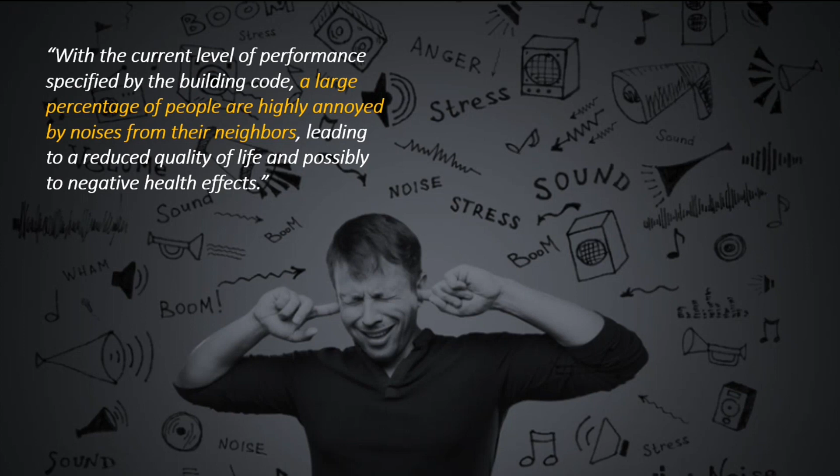So first, to start the conversation, I'll start with my favorite quote: with the current level of performance specified by the building code, a large percentage of people are highly annoyed by noises from their neighbors, leading to a reduced quality of life and possibly negative health effects. This comes from the ICC, the International Code Council, their G2 2010 guidelines for acoustics.

I know there's a lot of acousticians here, so this is nothing new, but for any architects, contractors, or other folks here: the STC and IIC requirements in the code are minimums. Typically, as acousticians for market rate apartments and especially condominiums, we try to design above those code minimums. Keep that in mind as we go through this conversation about shear walls and the STC ratings for them.

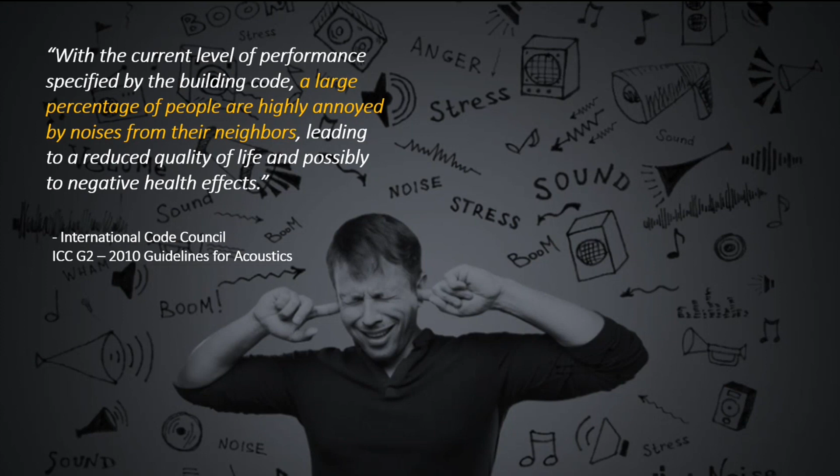There are a lot of other kinds of projects too—schools, hospitals, government buildings—where we have different STC targets we're going for. Sometimes they're higher than the STC 50 code minimum for multifamily, sometimes lower, just depending on what we're dealing with. But that's just to set some context for us.

For some additional information, these are recommended ratings from the ICC guideline document, recommended for multifamily residential construction. STC and IIC 50 are the code minimums. The acceptable performance level is STC and IIC 55—I think a lot of acousticians typically use that for market rate apartments. It might vary from person to person, but that's what I typically see.

And then preferred performance is STC IIC 60—you'll see that recommended a lot for condominiums and things like that. So keep those numbers in mind, especially STC, since we're talking about shear walls here.

So what are shear walls? Not to assume everybody knows what we're talking about—all the examples I have today are wood stud walls, typically 2x4 wood stud walls, but you can have shear panels in steel construction as well.

The shear panels are there to resist the racking motion of the wall. You typically see them in load-bearing walls, there to resist the racking motion of the building structure. They're even more prominent in seismic areas, like here in Oregon where PAC is, where I am, because you have more that might happen to the building in an earthquake event, so you need more shear strength to resist that motion.

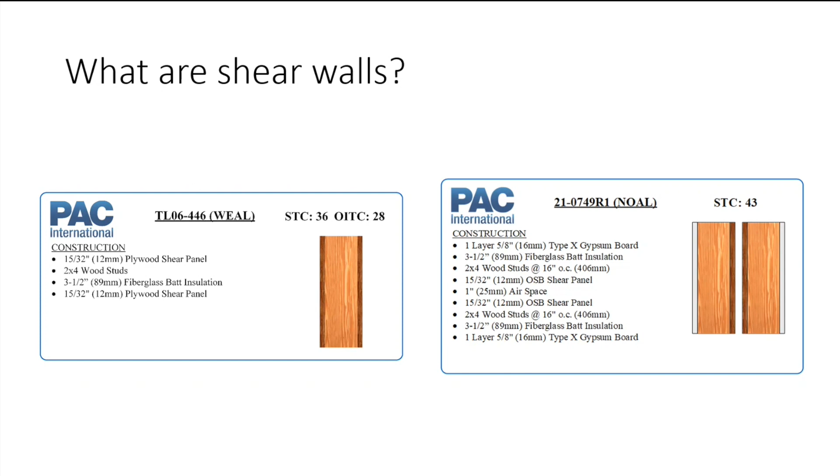So to understand why the shear panels maybe create more of an issue, just real briefly: through a wall, we have two transmission paths for sound. We have a structural path, which would be your surface layers. As the air waves, the sound waves hit them, those air pressure fluctuations will make that surface vibrate, and those vibrations get transmitted through the structure it's connected to, and then transmitted to the other side, and that excites the air on the other side of the wall. That's one path that we have.

And when we apply sound isolation like resilient channels or sound isolation clips, or we do two separate studs, we're interrupting or breaking that structural transmission path. But we have another transmission path too that we need to be concerned with.

That's really what comes into play in some of these double shear wall configurations, like that double stud - this air cavity path. The sound waves hit upon the wall, they make this panel vibrate, and that panel makes the air inside that cavity vibrate, and it transmits through, makes the panel on the other side vibrate, and then radiates sound out. So really that air inside the cavity acts like a spring.

If you remember summer camp, those big blob things they'd have at the swim areas - you would jump off of it, and somebody could be on the other end, you jump on it and the air would push the person up and they'd go flying in the air, shoot off. So we're using that air as a spring to transfer the energy of the impact on one side to the other side and push the person off. That's what's happening here with this.

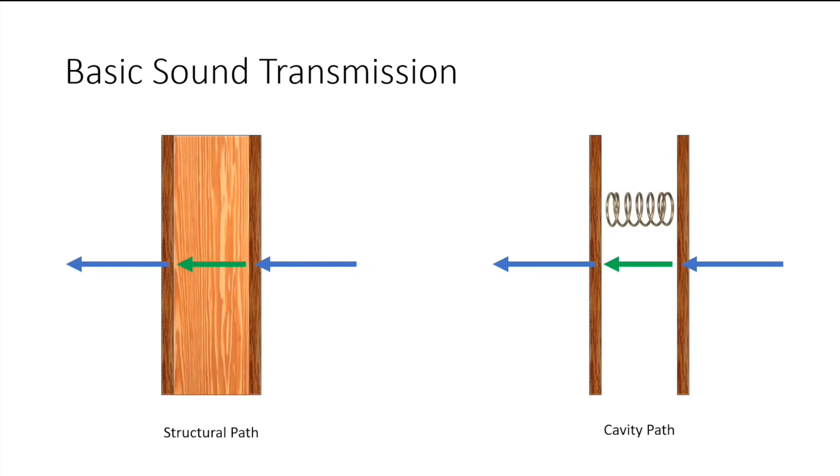So think about, okay, well, we've got a shear wall. We have our shear layers that have to be attached to the structure. How do we get some isolation in here? Well, let's just add isolation on top of the shear panels. That improves the wall. If we remember, this base wall was an STC 36.

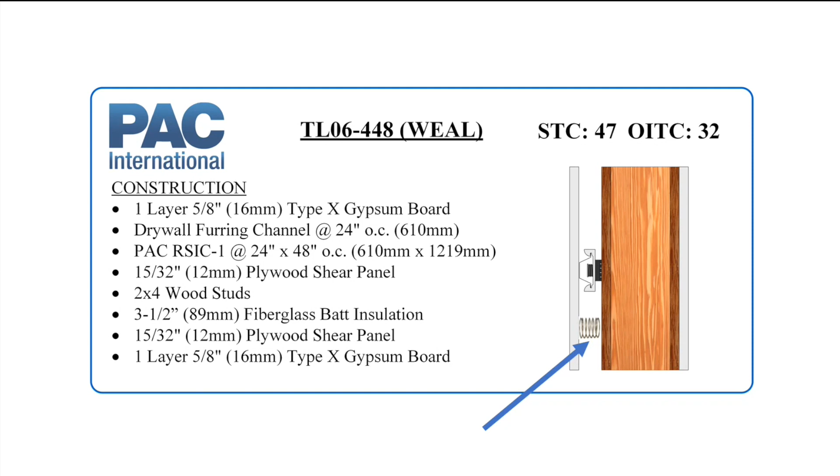We've got a 47 now, but we're still not to the code minimum. And part of that is because we've created this little air cavity and we've got this air spring in there, that's transmitting energy from one side to the other. So we can add insulation to that cavity to basically damp or resist that motion of the sound waves within that cavity, and we can get performance gains.

So here we have an STC 53. Now we've brought this wall back up above the code minimum. We've still got our double shear panels, and it's a fairly straightforward wall - single layer of sheetrock on each side, resilient clips for sound isolation. Pretty straightforward, not a super expensive wall, doesn't take up a ton of space.

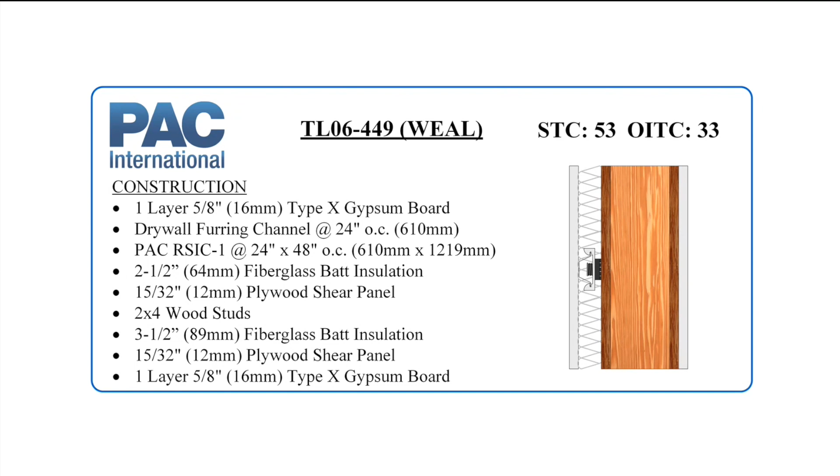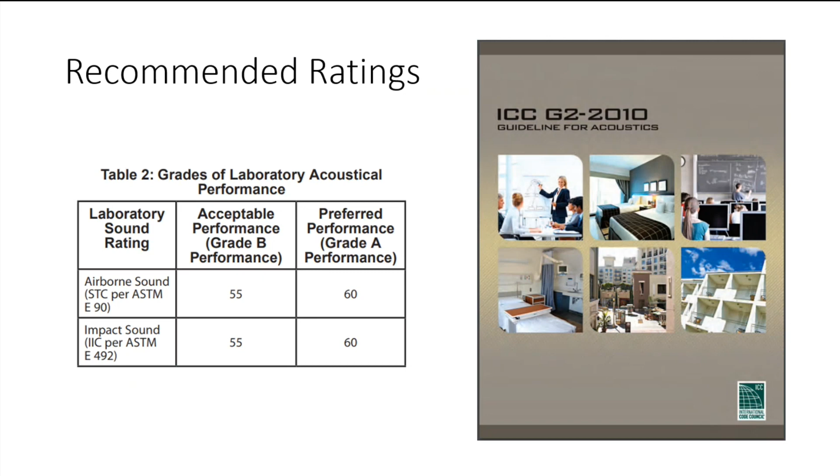So that's the basic gist. Now I'm just going to go through and show some data because there's some interesting stuff that happens. We'll talk through the data for both a single stud and a double stud wall. Just as a reference as we go through these: code minimum is 50, acceptable - maybe like market rate apartments - 55, preferred 60.

So here's some double studs just to show the range of these and how we can work our way through. We start with the basic wall, STC 43. That wall, if you remove those two shear panels - and I'll show the data later - that's an STC 56 or thereabouts. So we see a big reduction in performance by adding those shear panels. If we just add mass, doesn't really get us a whole lot. Adding resilient channel on one side also doesn't get us a whole lot, because we just haven't changed that air stiffness coupling enough to really get the performance we need.

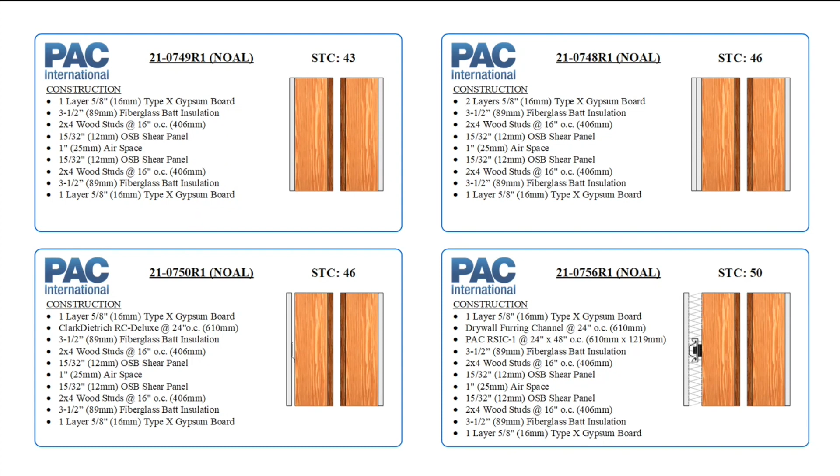Going to the RSIC clip, getting a bigger airspace, getting more isolation gets us to that code minimum of STC 50. So we'll walk through these.

As a baseline, here's a typical wall design: a 2x4 wood stud wall, RC Deluxe, single layer of gyp on each side, tested at STC 50. There are times you'll test this and it comes in below 50 — I wouldn't count this wall as a true 50, but it's the data I had to pull to give you TL data, so take that caveat into account.

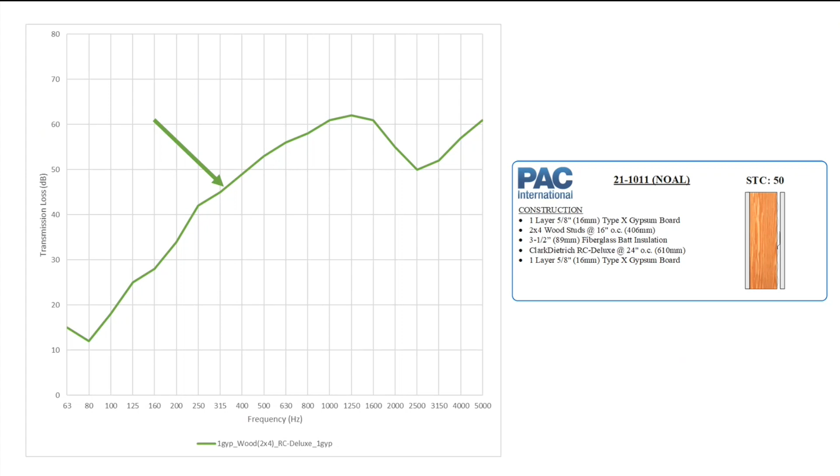Here's our baseline. We see a pretty typical curve, a little dip at 80 hertz, and then the coincidence dip around 2500 hertz.

Now what happens if we do the shear wall? Here's the 2x4 wood stud wall with plywood shear panels on each side. Again, no gypsum board here — this isn't a fire rated wall, not what you'd actually use as your final demising wall, but just as a baseline to walk through this data. We see a huge degradation in the transmission loss values from about 160 hertz on up. Interestingly, at low frequencies we actually see better performance.

I'm comparing walls from two different labs, which I'll rant about as not a great thing to do, but I didn't have another good baseline for that base wall. So take the low frequency data with a grain of salt, but there might be something going on there. For the shear wall, we see a flat line at around 20 dB TL from 63 to 200 hertz, then it creeps up — but across the entire frequency range, the wall's not doing very well.

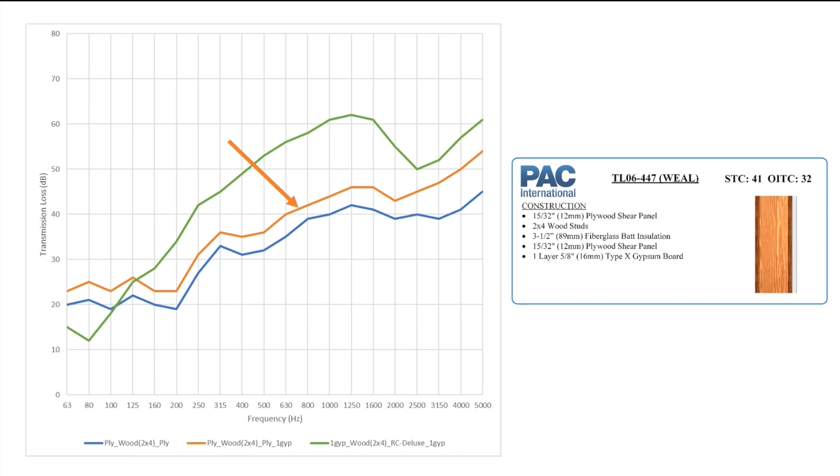So what happens as we add gypsum board to this? If we add gypsum board on one side, adding mass, we see an increase in the TL across the entire frequency range, as expected. Helpful, but it still doesn't get us anywhere near our target of STC 50.

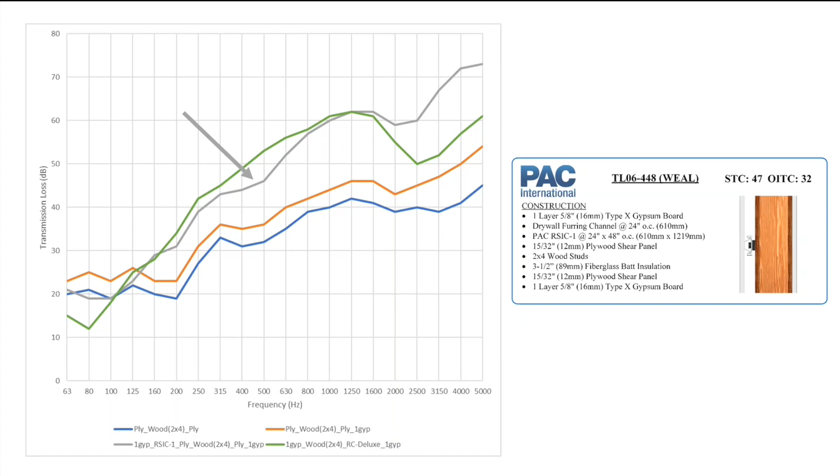Here's what happens when we add clips and gypsum board. The green line is our base wall, our RC wall, and the gray line is this wall with the clips. Our TL values are fairly close to the base wall, and at the coincidence dip and above they're even higher. But we still have a dip around 400 and 500 hertz that I think controls the STC rating — so for the most part our values match the base wall, but we're still limited in this one frequency range.

We add the insulation, and that improves all of that — now we have a wall that actually outperforms the base wall across the entire frequency range. And of course, adding additional gypsum board layers can raise that rating further, getting you into a mid-level or maybe even preferred grade. Unfortunately this is an older data series, so I don't have additional tests with more gypsum board, but you can probably fairly easily figure out what would happen by adding more mass to the wall.

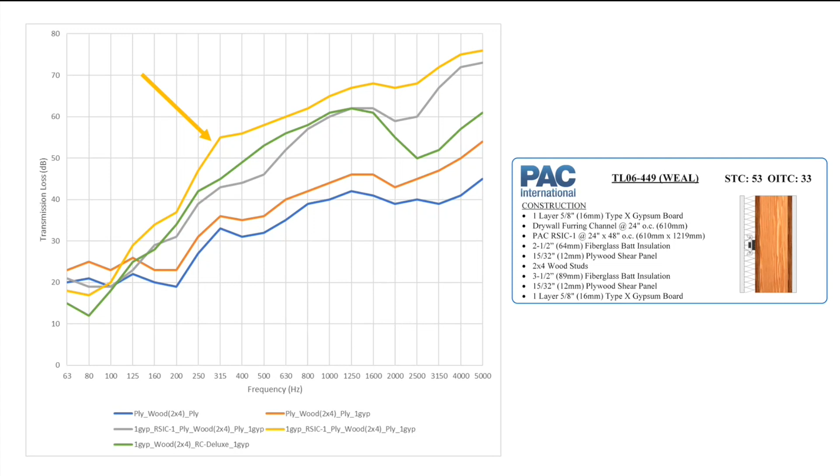For comparison to a more typical demising wall — something I saw a lot on apartment projects here in Portland — here's a 2-1 wall: two layers of gyp direct attached to the studs, one layer on RC Deluxe. You can see the shear wall configuration, even with a single layer of gyp, matches the TLs pretty much across the entire frequency range, except at the coincidence dip, where the rubber isolator in the RSIC clip and the presence of the shear panels sort of takes out that dip. So we can get a wall that meets our typical performance expectations for an RC wall.

This comes up quite a bit — we've had a number of projects recently. I had an architect call a few weeks back about an apartment project. Their corridor walls were going to be single stud with resilient channel, probably the exact wall shown at the bottom. But at some point during construction, the structural engineer updated the structural design and changed from a single-sided shear panel to double shear for all of those corridor walls.

At the time they made the change, or the change was caught, they'd already framed those walls as single stud walls, and the project was already far enough along where they couldn't change to staggered studs or a double stud wall or something else to get them where they needed to be. So they were scrambling, trying to figure out a solution. Here's a solution that can kind of get you there.

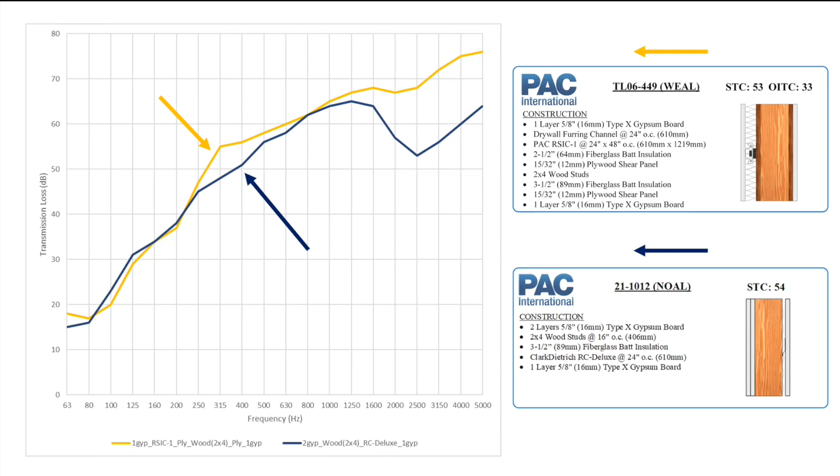Especially for corridor walls where you've got doors in them and your overall composite STC is somewhat limited anyway. So single stud walls, there's the data. All of this data you're seeing here is in our assembly selector and our databases, so you can log in, see the full test reports, and get all the TL data that I have here.

Now let's go to double stud walls. We'll do the same thing, just walk through it. As our baseline, our old handy dandy reference, National Research Council of Canada, here's a double stud wall, STC 56. Again, I'm going to compare tests from different labs. I apologize, but I didn't have a baseline from the same shear wall test series. So here's this reference, which a lot of you also use. Here's this data, and we'll compare to it as we walk through.

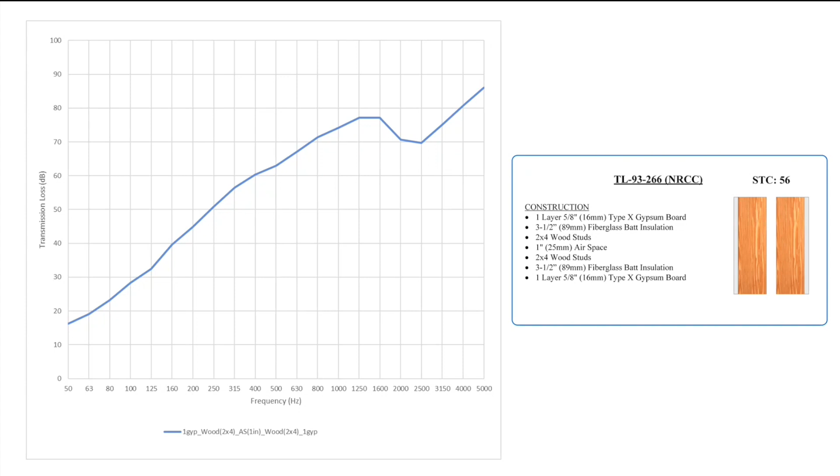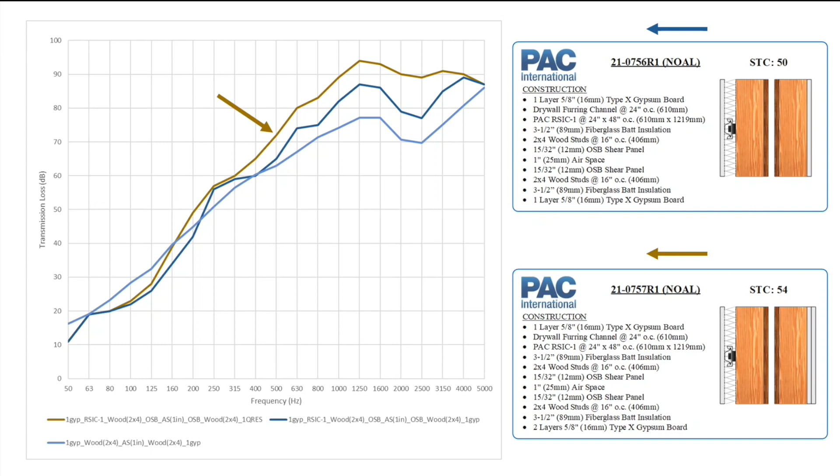The last thing I want to touch on with this wall - I wanted to present this actual TL data from the test report. Again, all the test reports are in our database. You can see here that this wall had very few deficiencies. It's totally limited at 125 hertz. We only had 11 deficiencies total, and 8 of those were at 125 hertz.

This is an interesting one because I know that in the acoustics community at ASTM there's this whole conversation going on about the 8 dB rule and eliminating that. For those that aren't part of that - any architects or contractors, anybody else joining us - the 8 dB rule is a part of how we calculate the STC rating.

I've got a webinar online, you can go look at how that's all calculated. But part of the stipulation within the ASTM standard for how you calculate an STC rating is that the deficiency - the amount that the blue line is below that gray - can't exceed 8 dB at any one frequency.

And a lot of times in walls, like you see here, that becomes the limiting factor. The other stipulation is that the total deficiencies at all the different frequency bands can't exceed 32. Here we only have a total of 11, so we're well below the sum of deficiencies limit, but we're limited by that 8 dB.

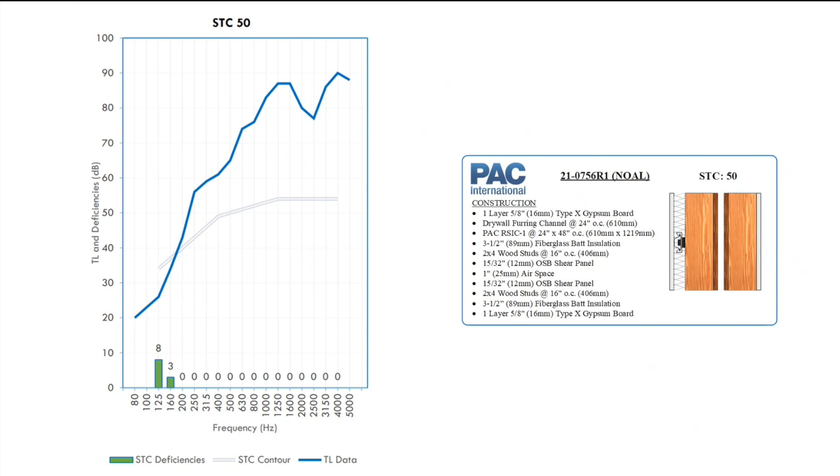So the last thing I want to touch on, and we'll then just open it up to discussion - this is a little bit quicker one - is fire ratings. At PAC, we put a big emphasis on fire ratings, making sure we're testing and providing designs that work acoustically, but also work for other things, structural and fire life safety.

So from a fire life safety, UL fire rated assembly design standpoint, how do these shear panels factor in? Typically, if you go look at a UL fire rated assembly like U305, for instance, a typical one for 2x4 wood stud walls, you won't necessarily see wood shear panels called out explicitly within that. There is a general provision - some just general guidelines that UL has for how you can tweak things, add things, and help interpret the UL designs.

One of those in there for walls specifically is around wood structural panels, and these are the provisions taken straight from it. The addition of wood structural panels in fire rated gypsum board wall assemblies is permitted - that's how we can get them in there. Wood structural panels 4 foot wide, minimum of 7/16 inches thick - there's some specifications for what that needs to be.

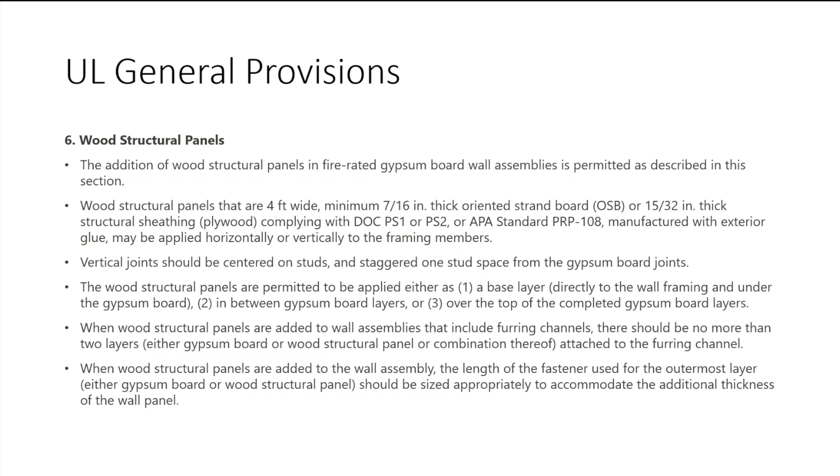In the chat, it says, how do you test these walls with both layers of plywood on the inside of the studs? So the way we've built these, I actually wasn't there at the lab when we built these. Elzo was, and I think he's here. But I think in the lab they either built them and then tilted them up into place, which is probably what you would do on a job site. In the lab, they may have actually built one in the opening, applied wood to it, and then pre-built the other one and then tilted it up. I don't know, Elzo, I'm sure you've got some additional things. You were there at the lab to say how they built that particular one.

I see you already said that, Steve, that they're sheeted before. Elzo says I'm right. Okay, cool.

So what brand, type, thickness of insulation do you normally specify at the RSIC cavity? So brand doesn't really matter. It's typically just fiberglass bat, usually R8, which I think is like 2 or 2.5 inches. So it is compressed slightly because the air cavity formed by the RSIC clips and hat channel is 1 5/8 inches. So I think R8 is about 2 inches, so it's compressed 3/8 of an inch, but it's bat insulation. So that's not enough compression to create stiffness in the fiberglass that's going to actually transmit energy or anything like that.

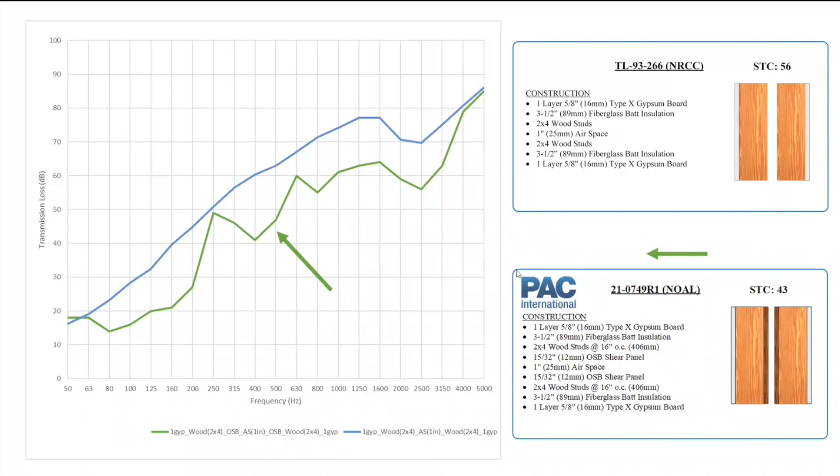Yeah, so the STC 43 is your 4-layer wall. Right, that's our 4-layer, and then let me click through here. So there's, and then you've got the 5-layer one, yeah. Right, which is the 46.

And we didn't go to a 6-layer wall, or an additional layer of gypsum board on that side. And I don't think, I put you in contact with Ben Schaefer, who had more data from this test series because they were sort of the original sponsors of it, and I don't think that he had that additional one. So the California Green Book is very old data, and yes, I know that in many instances where people have gone back and tried to recreate some of the older data, they haven't been able to do it, right? So I wish that we had that other test, and maybe it's something that Ben and I can go back and redo that additional one.

I mean, looking at the TL data and looking at the sequence of these, like the 43 to 46 for adding that second layer on one side, that makes sense, right?

That sort of follows mass law, what we would expect. So to have that 46 then go to a 55 just seems very unreasonable to me.

Yeah, I 100% agree with that. And it just seemed like some goofy test, but I have actually tested the wall in the field and gotten good results from it. Got like an STC 53 or 54 or something like that.

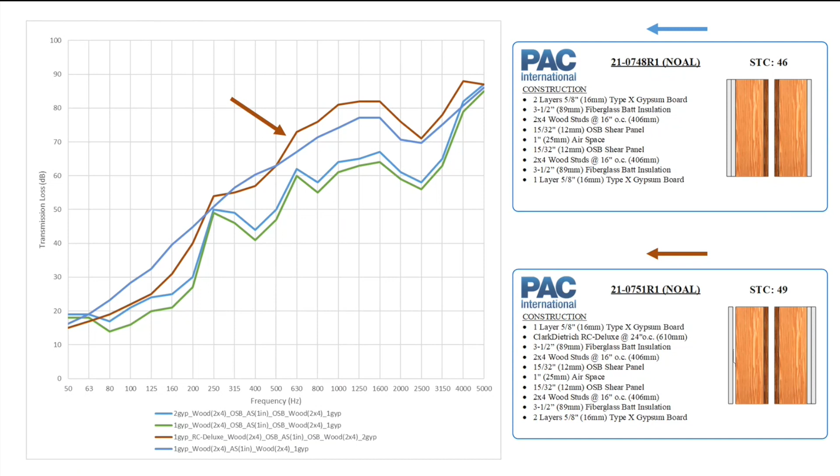You can also do it in steel framing—you just form a box beam with a stud and a track, and then you would mount to it. So you could use that to isolate cabinets and things like that to avoid structural transmission from drawers opening, getting spoons out, and things like that.